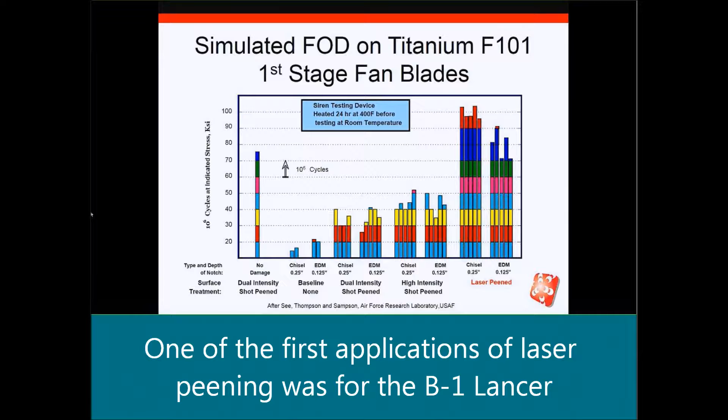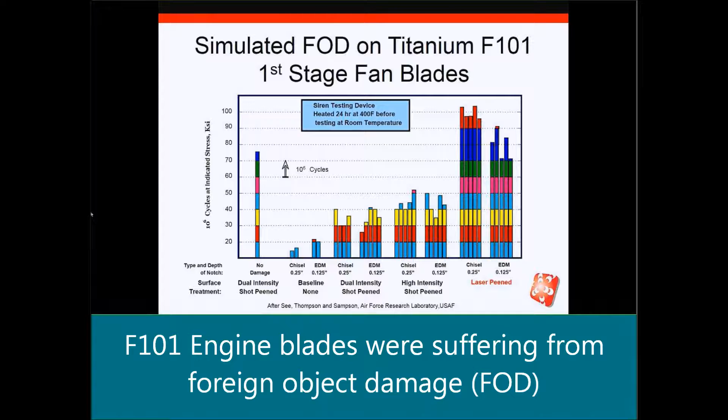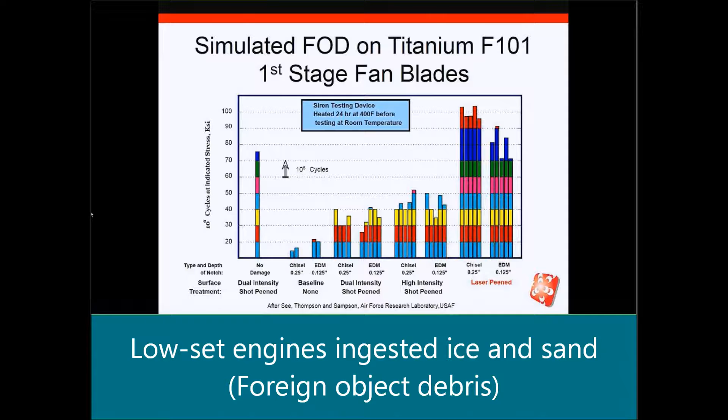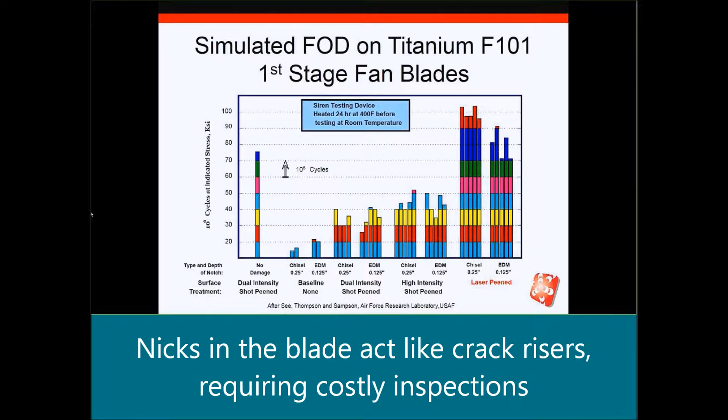That engine and that blade, the F101, was suffering a great deal of foreign object damage, little nicks, from ice or from sand, because the engines were pretty low on the wing, and so as it took off, it would suck in debris, cause these nicks, and these nicks would act like crack risers. The Air Force had to spend a great deal of maintenance time inspecting the leading or trailing edges

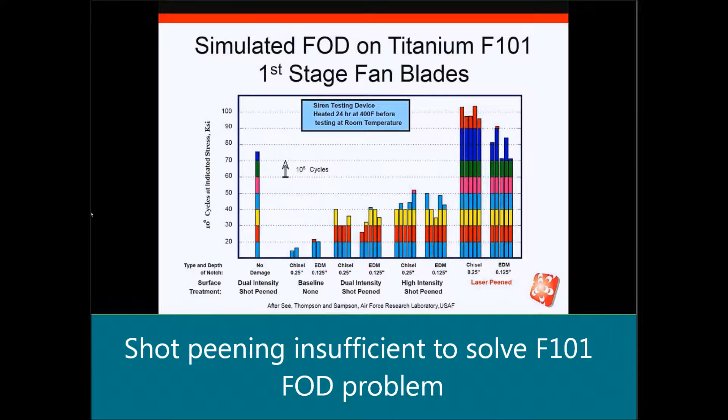of these blades to see if the nick has reached a depth that could cause engine failure. So they looked to shot peening first to see if that could improve it, but finally they ended up looking at laser peening, and these are the results of a siren test.

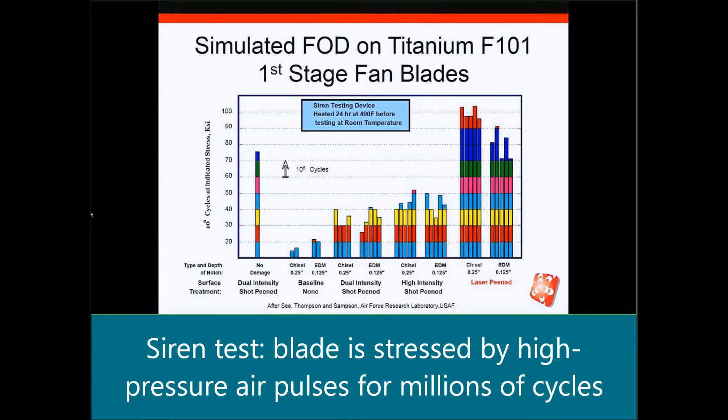A siren test is a test in which the blade is exposed to a series of high-pressure air pulses for 10 to the 6th cycles. Then the pressure is increased by 10 KSI, and that blade is then exposed for another 10 to the 6th cycles. That continues until the blade fails.

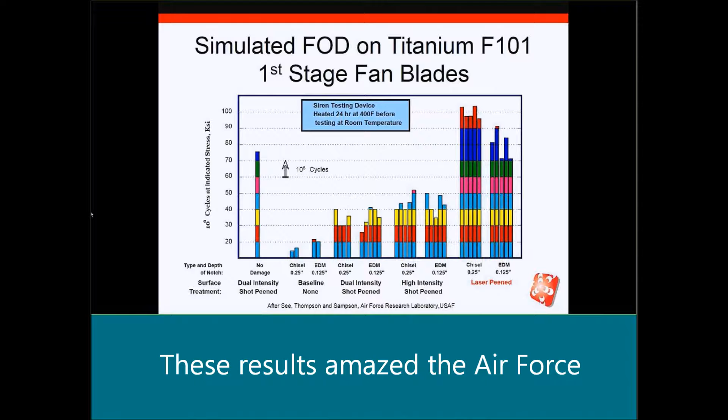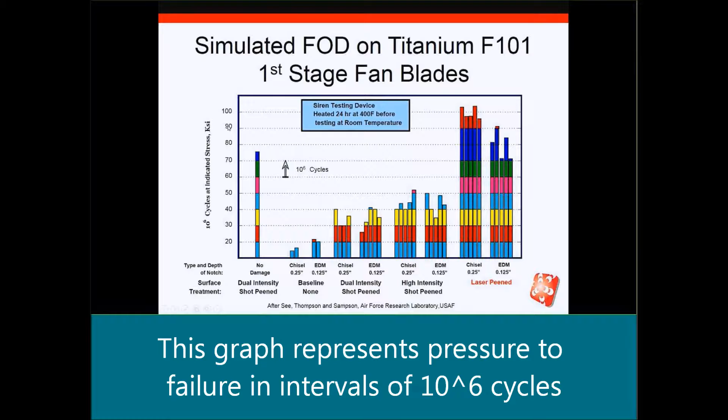These are the results of the siren test that really amazed the Air Force and got them quickly on board with laser peening. What we have graphed here is the pressure to failure in intervals of 10 to the 6 cycles.

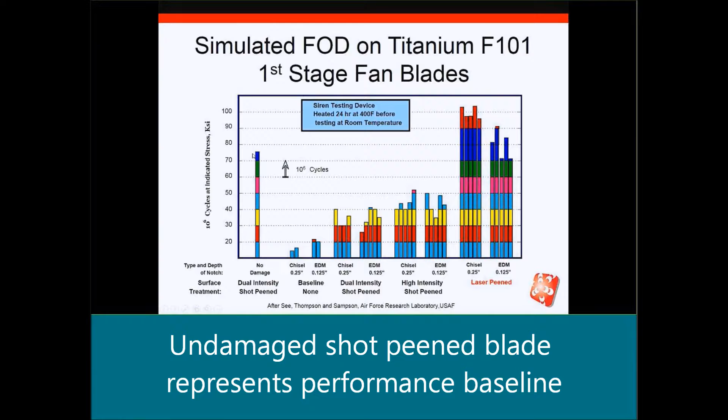This first bar graph is for an F101 blade that was shot peened with dual intensity but had no damage. It reached 70 KSI after cycling through a number of cycles.

Then they put a chisel notch and an EDM notch in that blade, and they did no treatment. You can see that for the chisel notch, it didn't even make 10 to the 6 cycles, and for the EDM notch, it just barely made 10 to the 6 cycles.

They were able to improve that effect by applying dual intensity and high intensity shot peening, getting up to 40 KSI and about 3 times 10 to the 6 cycles.

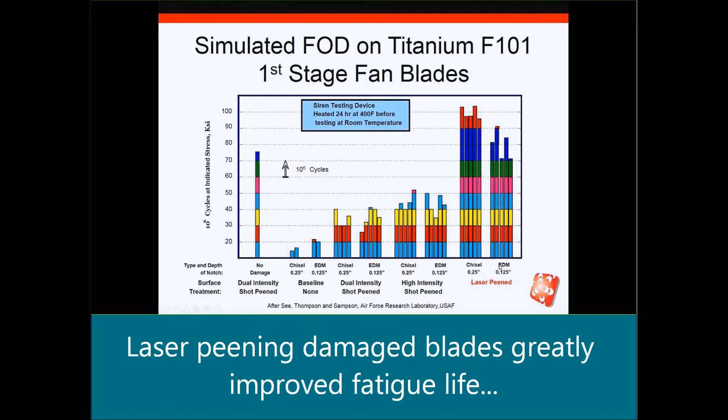But then when they applied laser peening with the same kind of chisel notch, a quarter inch or an eighth of an inch EDM notch, not only were they able to achieve greater results than they could with the shot peening, they even got better results in general than a pristine blade that had no damage.

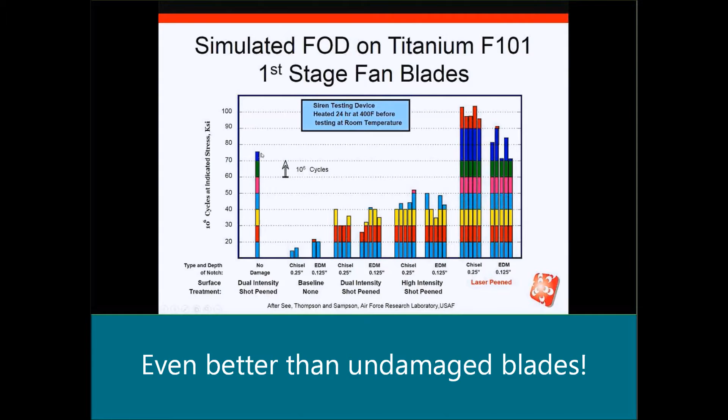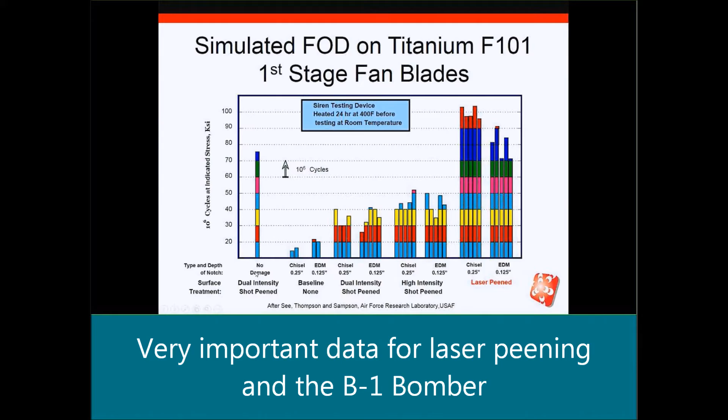This data was very important to finding an application for laser peening that could improve fatigue life and could improve the safety of the crew and of the bomber. As a result, the Air Force applied laser peening, as I mentioned before, to F-14s, F-15s, F-16s, F-22s, and the B-1 bomber.